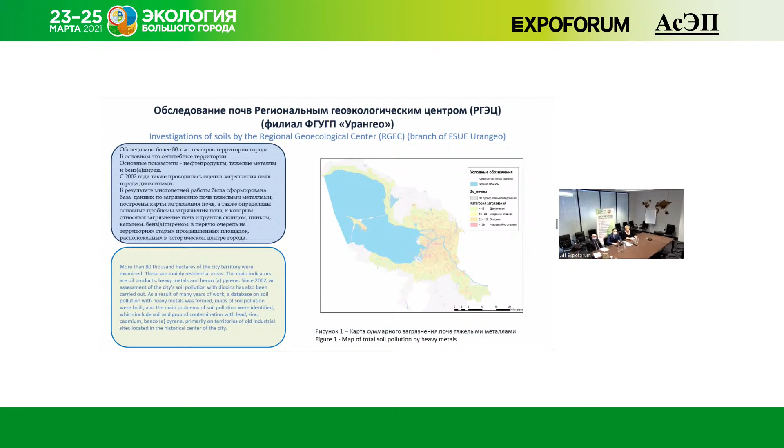Here, in the picture, you see the results of the investigation of the territory of our city from 1990 to 2020. About 80 thousand hectares were investigated. Petrochemicals, heavy metals, and benzopyrene were the main parameters to be assessed. Also, dioxin content was assessed. As a result, we produced such an integrated map. You see total concentration of contaminants in the territory of our city, and currently it is the only complex map telling us about soil contamination in our city.

The work carried out in 2019-2020 showed a bit different results because the tasks were a bit different. Our goal was to find proper places for monitoring posts. So we also carried out some work for petrochemicals identification, benzopyrene identification, dioxins. You can see the results on the slide. So what are our outcomes?

In St. Petersburg, the majority of soils in residential areas is dangerously contaminated, which is quite obvious. Historically, in industrial sites, contaminants were accumulated. For example, in the central area of St. Petersburg, in historical parts, we found mercury in the soil in the area of former gold plants, where structural parts were gilded in the past.

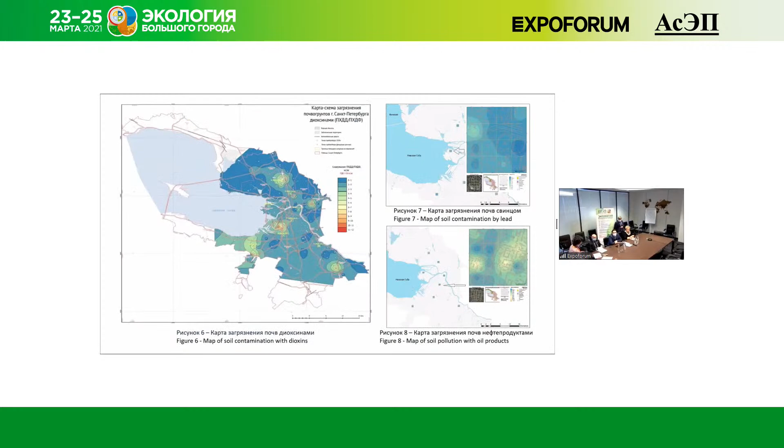Also, we studied the dynamics of soil contamination monitoring. We realized that within time, the concentration of contaminants is changing. As a result, we analyzed the situation with soil contamination in all the regions, and the results you see on this slide.

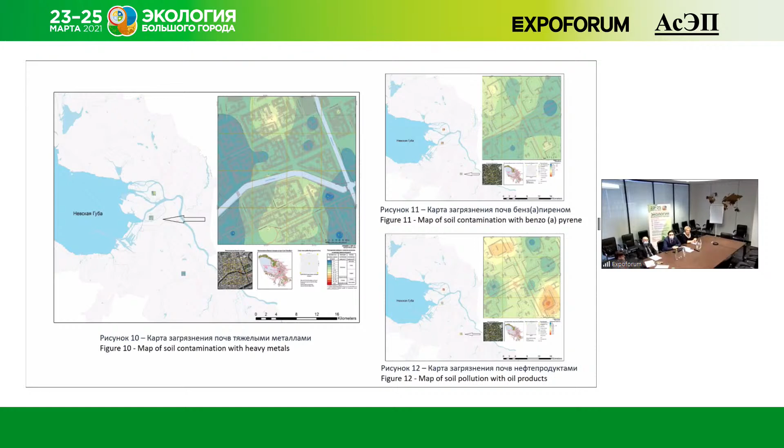We continued this work in 2020. However, the task was different this time. We needed to develop methods of monitoring, and we studied some additional territories in our city. The results you can see on this slide. Heavy metals, you can see 3 pilot areas studied in 2020, and the results of the study.

This work allowed us to assess the dynamics of content changing in the soil of St. Petersburg. As for heavy metals, their concentration is decreasing within the period of 30 years. As for benzopyrene, the concentration is increasing, which is in line with the Rospotrebnadzor statistics. We see it from the point of human health, not from the environmental point of view. As for petroleum products, it's the same. As for dioxins, it's increasing, but it is within the allowable range.

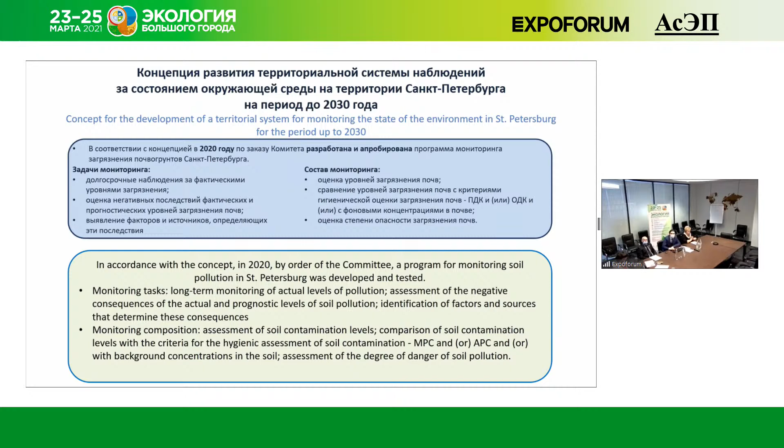Last year, the Committee for Nature Use developed a concept of the monitoring system development for the period up to 2030. And soil contamination in St. Petersburg is one of the aspects of this monitoring. So several tasks were set: long-term observation and assessment of negative consequences, as well as the reasons of soil contamination. So different soil contamination levels were assessed and compared with allowable maximum and tentative levels.

This work allowed us to identify 120 areas in all the regions of St. Petersburg to be studied. Also, key indicators in accordance with the monitoring program, including oil products, heavy metals, benzopyrene. So we plan to carry out survey in all these areas. So we are waiting for the results to compare.

This is the exhaustive list of all the indicators to be monitored. You see that for different areas, the list of indicators is different, but the basic contaminants are to be monitored in all the areas.

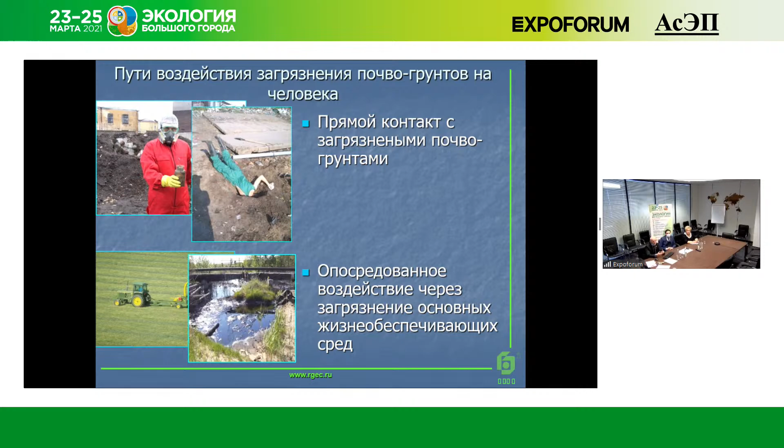So finally, the norms we use in the Russian Federation are not about direct contact with contaminated soil. These are heavy metals, for example. For 50% of cases, we have translocation criteria when we deal with contaminated soil via food products.

So when we say that in St. Petersburg contaminant concentration is 2 times higher, 5 times higher, it only means that we cannot grow food products there. It doesn't mean that the contamination directly negatively influences people's health.

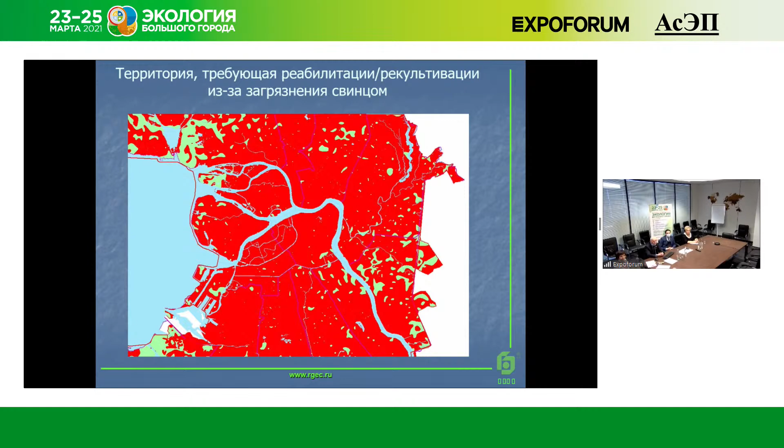In red, you see the territory in St. Petersburg which is not in line with the maximum allowable concentration norms for lead. You can be shocked, but if we look at the German norms for playgrounds, for example, the picture will be very much different. If you compare our Russian maximum allowable level with those of Finland or other European norms, you will see that our allowable levels are very much the same as those of European countries.

But the levels which urge us to immediately start cleaning are very much different. In Russia, it's several dozens of times higher. This is the difference of approach in Russia and in Europe.

Krasny Bor field is a good example. We have a lot of discussions about its contamination, but if we compare Russian norms with Finnish norms, we will see that we will not have any excessive contamination.

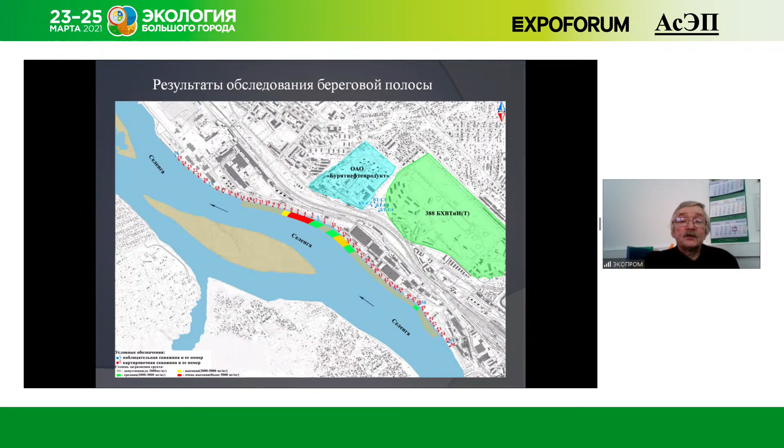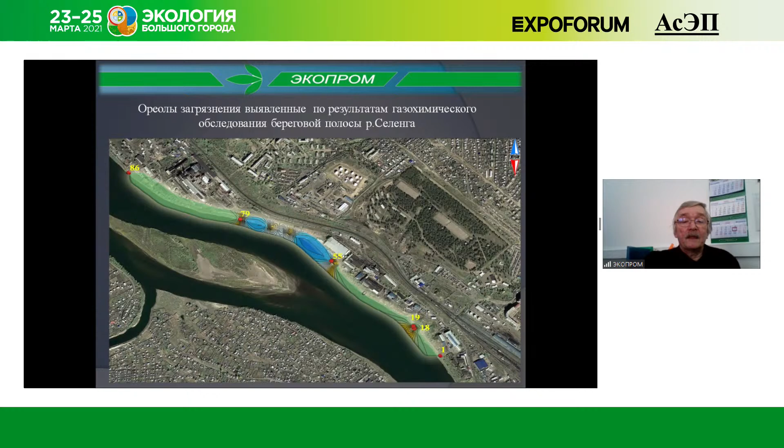We investigated the territory - 2.5 kilometers of the coastline. Chemical survey and drilling technologies were used. As a result, we identified a spot about 300 meters which was the most contaminated one. The soil was in very bad condition.

Except for the coastline, we also investigated the territory from the source to the Selenga River. Gas and chemical survey showed an approximate direction of petrochemicals from the source of contamination to the Selenga River.

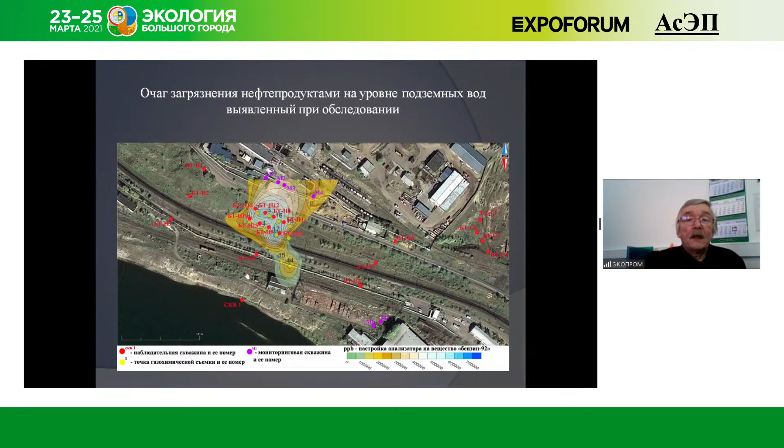To liquidate the process, we designed a project which allowed, at 2 levels, to protect the Selenga River, which flows into the Baikal Lake, actually.

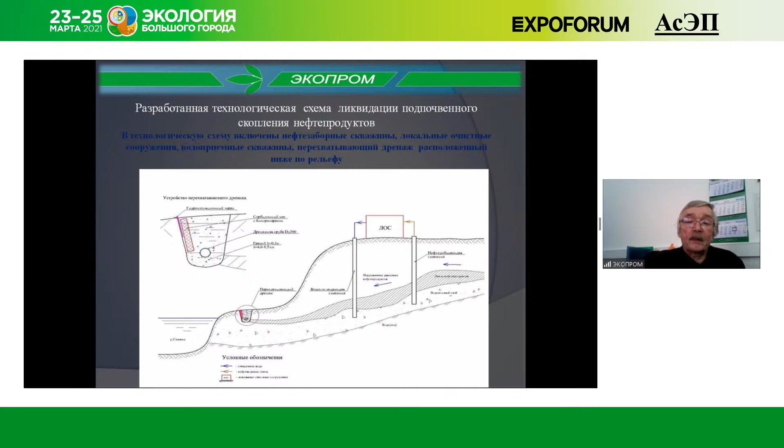First of all, in the project we designed a network of water wells to conduct the water and intake water in order to extract water from the contaminated area. At the coastline, we planned to construct a intercepting drainage system, which is a trench 1 meter in depth and width, filled with gravel, and there is a drainage trench there, the upper part of which is filled with cane bones.

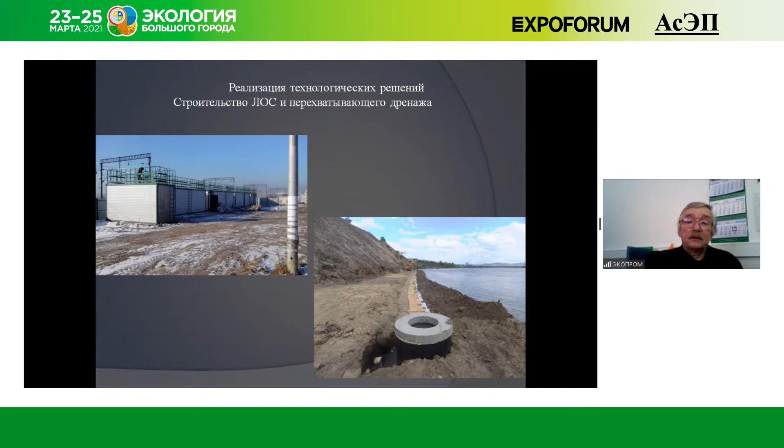So the project has been fulfilled. Here you see the local sewage plant - there are 5 modules there of continuous water decontamination. And you can see in the right picture a drainage trench organized along the coast of the Selenga River, which is filled with cane bones.

As a result of this work, we achieved the following: when we made the drainage trench, we extracted a lot of contaminated soil. Every year, cane bones impregnated with petrochemicals were extracted from the trench and replaced with new ones. 22 tons of cane bones impregnated with petrochemicals were utilized.

Except for that, 79 tons of water and petroleum mixture was extracted from the underground. As a result of the environmental monitoring, we realized that during the period of work from 2015 to 2018, the average capacity of the petroleum-bearing layer dropped 3 times.

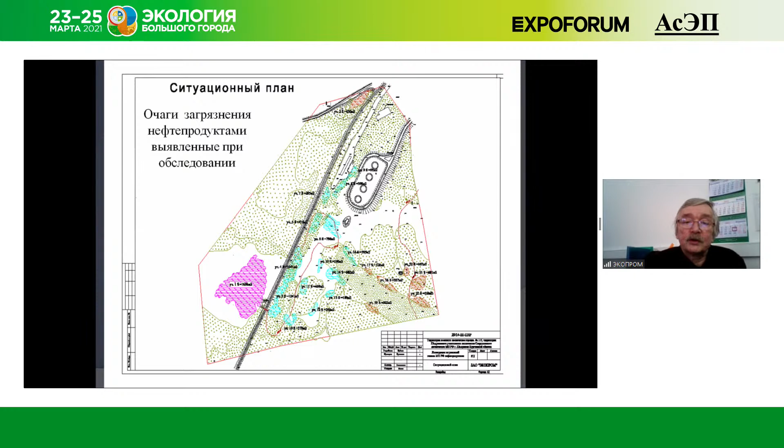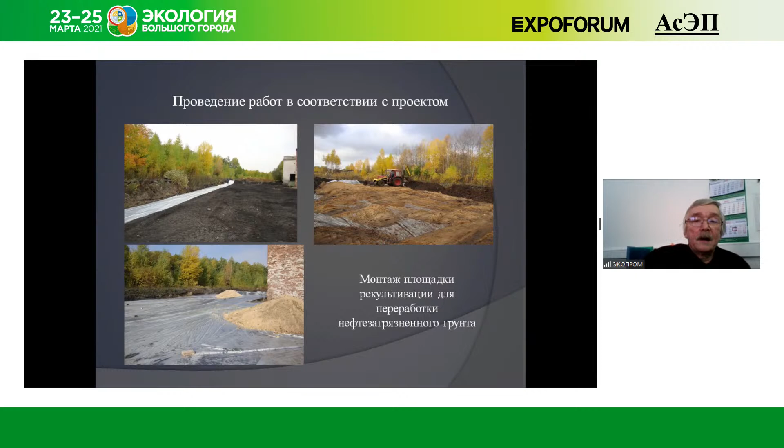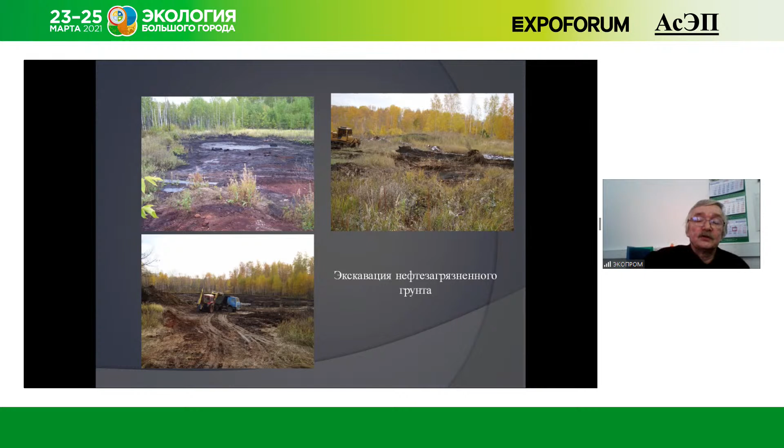In the picture, you see focal points of contamination. They're scattered around the site, and you see what we have done according to the project. We installed the recultivation field, the recultivation site. Here is the state of the soil contaminated with petrochemicals and excavation of the soil.

After 1 year of work, we extracted contaminated soil and performed a complex of biotechnological works. As a result, the initial concentration of the contaminant in the soil dropped 2 times.

Another site is located in Sverdlovsky region in the forest area. As a result of leakage, there were local spots contaminated with petrochemicals formed. According to the working project, we plan to decontaminate the soil by two methods: in situ without extraction of the soil, and with extraction of the soil with further cultivation in the field.

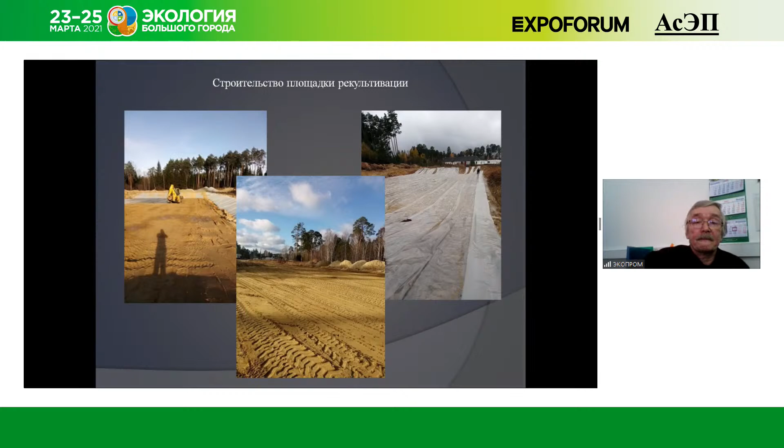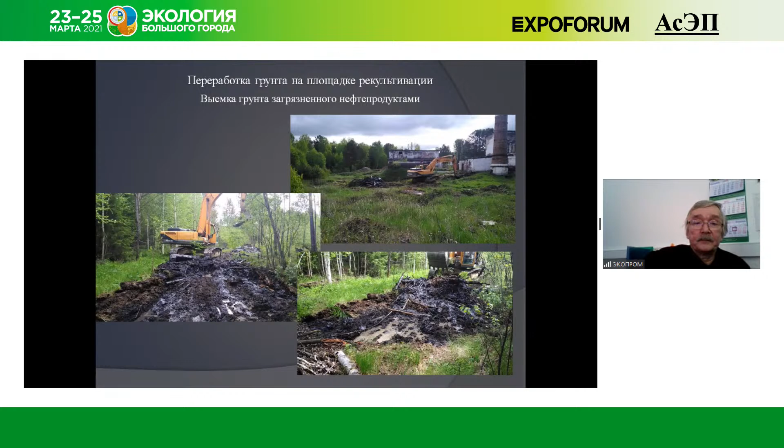Here you see the preparation of the cultivation fields. And this is extraction of the soil contaminated with petrochemicals. Placement of the soil at the cultivation field. Condition...

...of the soil after the first year of work, after we introduced structurators, mineral fertilizers, and bioagents. Here you see contaminated areas where we performed the cultivation without soil extraction.

We plowed the ground. We introduced peat. And then we treated the soil biologically. As a result, at the recultivation field, we decreased petrochemical concentration 2 times, and at the biological treatment site, without soil extraction, contamination concentration reduced 3 times. The work is not finished yet, it will be continued.

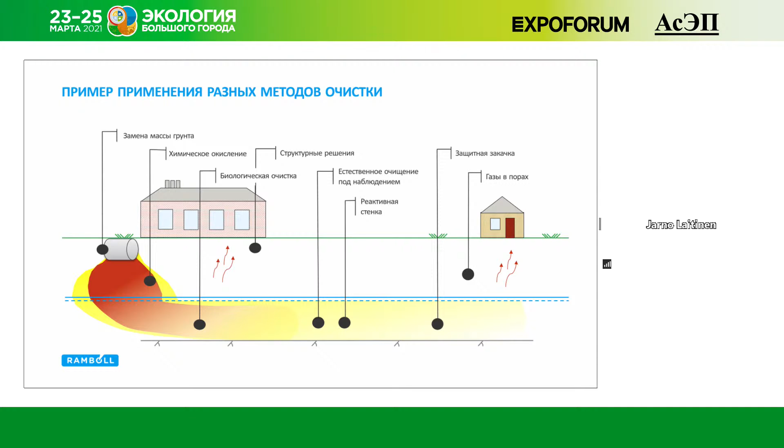So how do we move forward on selecting a method for remediation? Step number one is to identify the methods which would be suitable - meaning identifying what kind of remediation methods could potentially work for the contaminants in question.

Step number two is to assess their appropriateness, to see whether this method could be applied on this site - if the economics are good, if the soil is the right type, if there is no other infrastructure that would hinder the remediation. Now that we know the methods and the limits, we make different options out of this - for example, meaning I will excavate this part of the property and then use in situ remediation at this part of the property.

And then usually still at this stage you have a few options, so then you have to choose which one is most suitable for the project.

If we think about how to identify what kind of methods are best suited, it's best to start from the contaminant. Look into the contaminant - is this a contaminant that can be remediated with this method? Not all contaminants can be treated with all methods.

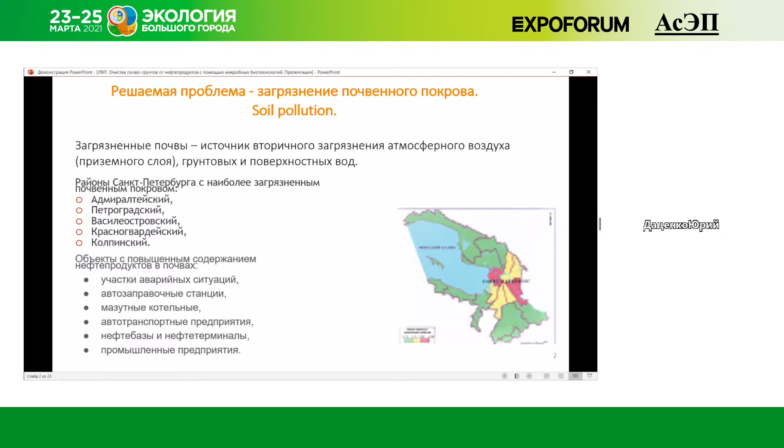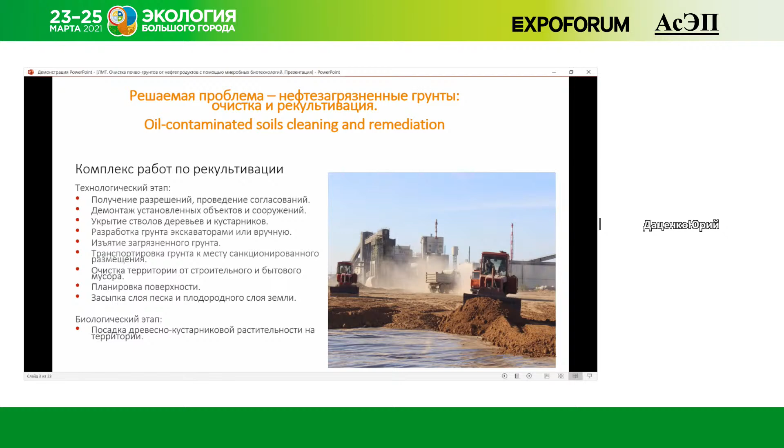This is the percentage of soil recultivated by excavation. So recultivation is quite a costly type of work, highly dependent on the weather. Of course, a lot of waste is involved with that, if we work within the city area. So all these are the limitations for using the method of excavation.

However, 90% of the soil is decontaminated using excavation method. So what do we offer? We offer a biological method - in situ rehabilitation based on the use of microorganisms, without excavation, without replacement of the soil.

Preparation of the project is 1 month. Installation of equipment is 1 week. The decontamination system requires a relatively small space. Our technologies allow us to get the level of petrochemicals in the soil from 0 to 15%. So within a couple of months, we can decrease the level of petrochemicals down to the optimal, allowable level.

In our company, we developed an underground biofilter system. It allows us to use microorganisms continuously throughout the year. The tank with the agent is above the ground, and we make injections - we introduce the agent into water-bearing layers. Underground waters distribute our bacteria, so it serves as a kind of transportation.

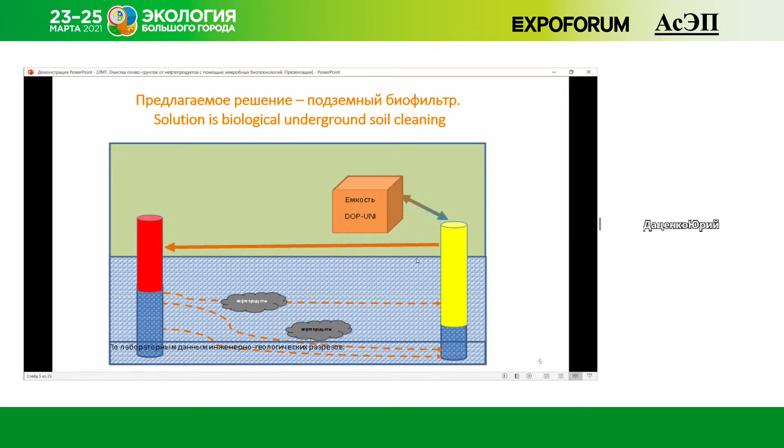So the technology itself is about the following. Microorganisms work to decontaminate soil. First of all, we have to identify the contents of the chemicals in the soil. Based on this information, we select the proper concentration of our bio agent, and we install the system, activate our bio agent, and then we monitor the situation. We see how petrochemicals are decreasing.

So we use water and non-pathogenic bacteria, which are not dangerous to people, neither for people nor for animals or plants. And no excavation is required. We do not touch the surface soil, which allows us to preserve all the plants and all the animals in the territory.

So the soil is transferred from a dangerous category to a low risk category, which is within the acceptable limits. This is experience of our technology's use in 2014.

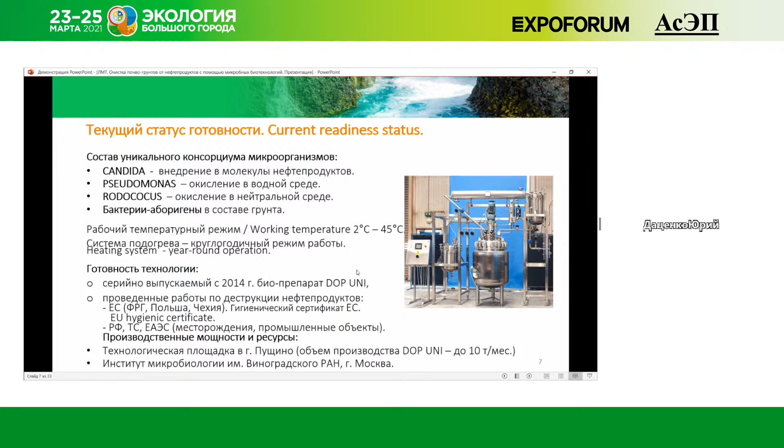Our institute is located in Moscow. We are working under the auspices of this institute and the Russian Academy of Sciences. The production platform itself is located in the Moscow region. This is a composition of our biological agent.

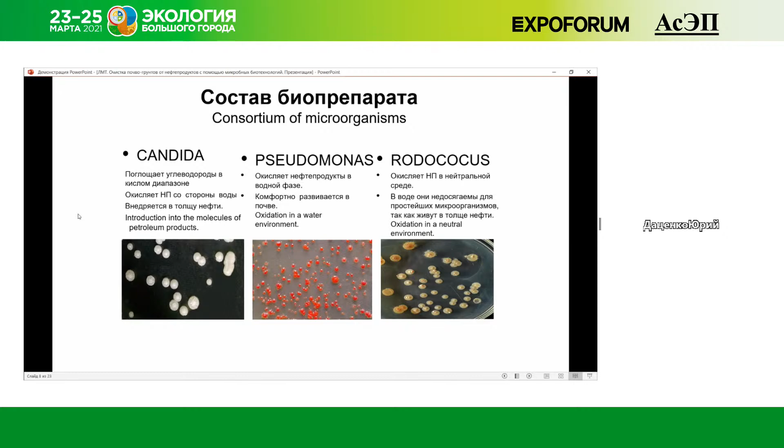Some bacteria penetrate the film on the petrochemical. They eat up the petrochemical - this is done by Candida and Pseudomonas, and Rhodococcus does the cleanup. As a result, we have active heat, water, and CO2. The speed of oxidation of hydrocarbons is 27% per month.

Can I remind you, the speed of work of our microorganisms is 27% per month. So depending on the concentration of contaminant, we can calculate in what time we can decontaminate this soil. These are the 3 parameters we use to report to our clients: results of analysis of petrochemicals in underground waters in soils themselves, and the results of microbiological survey.

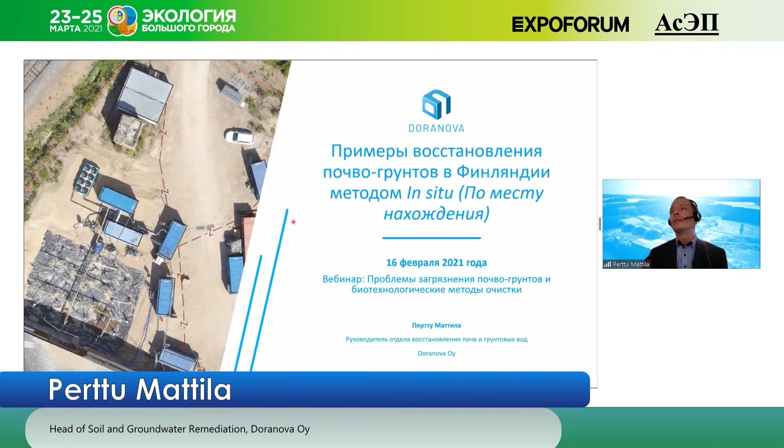Yes, hello all. Let's start the presentation. Hopefully you are able to see it now. First of all, thank you to the organizers for giving us the opportunity to give some insight from Finnish in situ remediation cases and views from a Finnish in situ contractor. So my topic is in situ remediation case examples from Finland, and here's the agenda for this rather brief presentation.

First a few words about the company that I'm presenting, and then altogether three case examples, all of these from biological in situ treatment of soil and groundwater. The first being one of our oldest cases, but in the context of the area and the size of the project, that has been one of the biggest ones.

So a site with chlorinated solvent contamination on a former factory area. And then the second case study is actually from the area of the city of Mikkeli. That's an old sawmill area, and there we had problems with chlorophenols in the groundwater, and that is also being treated with in situ methods.

And the third case example is also a rather big one. That's an old brownfield area, an old industrial area which is being converted into a residential area. So that's groundwater remediation in that case.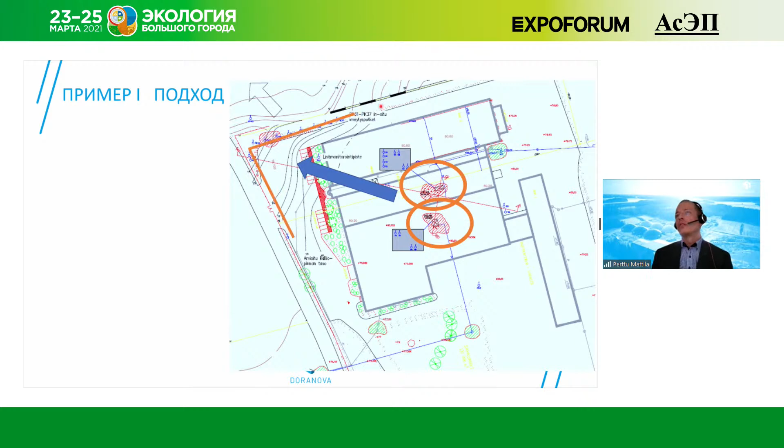Here we had some 30 injection wells which were used for the injection of the substrate into the subsoil.

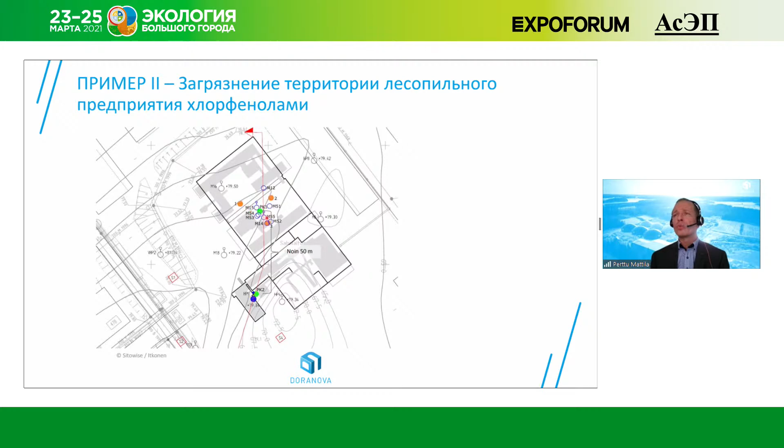Some background information about the contaminants: in this particular case, we had this anti-bluing agent used for treating timber, which has components, namely tetra, penta, and trichlorophenol, out of which tetrachlorophenol was the main contaminant in this case.

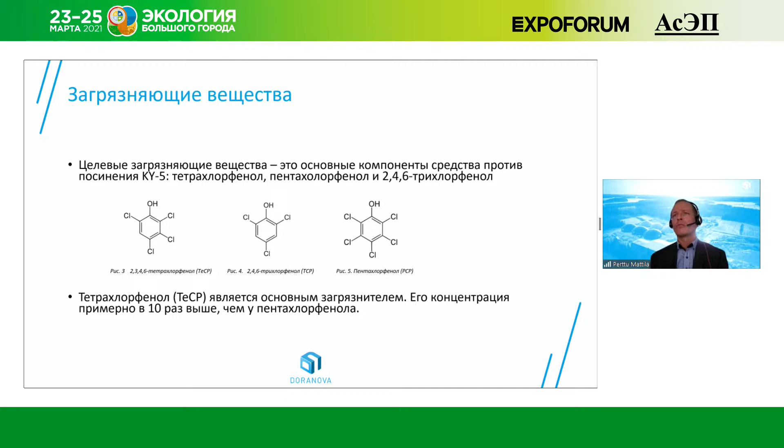We are pumping from one well outside the source area, then treating, basically aerating the water and taking out the contaminants. Once we increase the oxygen level of the injected water, it will eventually add oxygen to the source area, and oxygen in this case is the limiting factor.

There are university studies showing that if we increase the amount of oxygen in the soil and groundwater, the biodegradation will boost rather rapidly. So the idea is to change the conditions in this source area and get the microbes to break down the chlorophenols.

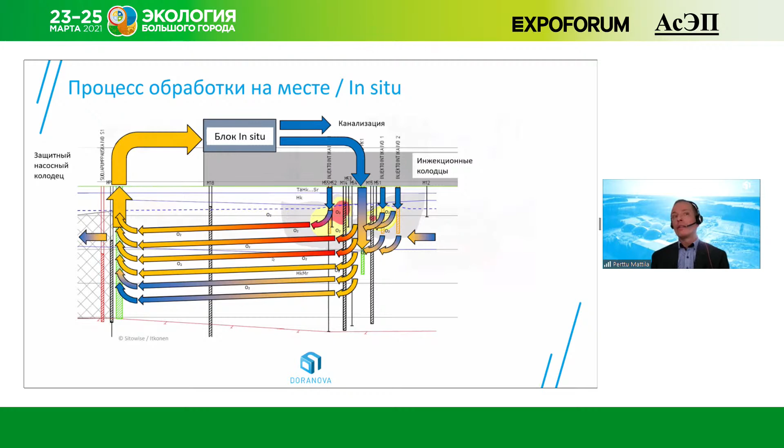In addition to this pure aeration of the recirculated water, we also injected chemicals which will add oxygen to the water.

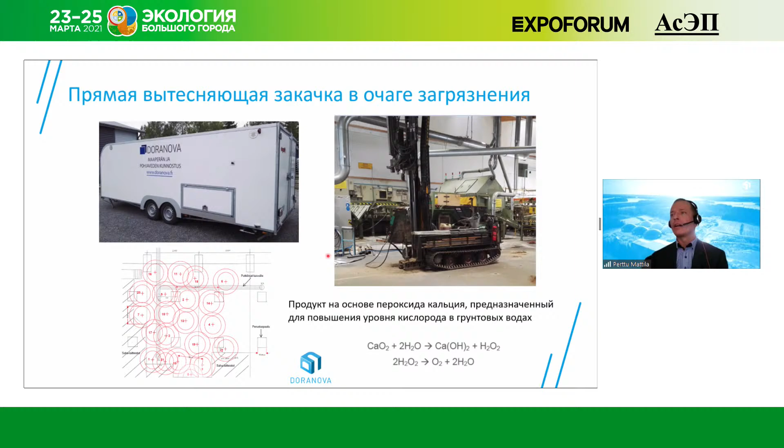This is also a project which is still ongoing, but here are some of the results or progress that we have obtained from this case.

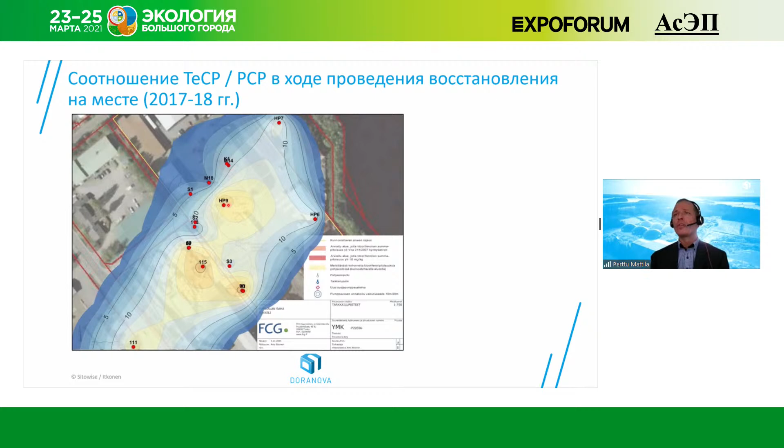So this is an aerobic process using fixed wells and also direct push injection of oxygen releasing chemicals to the source area—several different methods applied to one project.

Third example: this is a brownfield site where the groundwater is contaminated with chlorinated solvents.

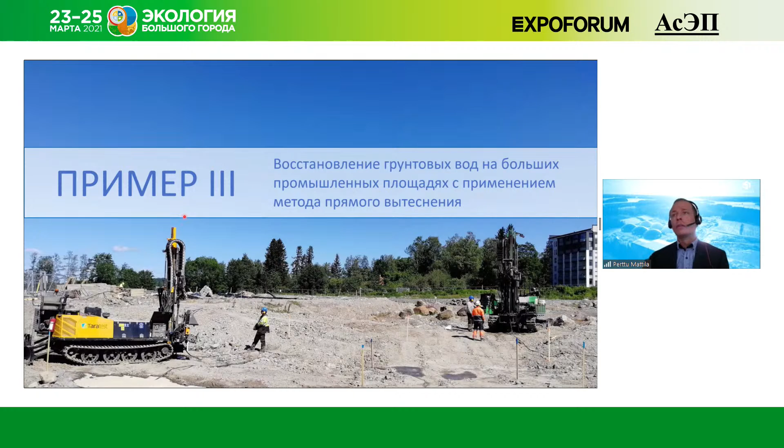In this case, it's an old brownfield, old industrial area with 100 years of operations. There has been a lot of excavation work done during the years, but the groundwater is still contaminated with chlorinated solvents, and the impacted area is over 9 hectares.

What we did in this case was inject and use this anaerobic biodegradation process once again, as in the first example. The difference from the first one is that we used direct push injection—basically, there are no fixed installed wells.

Instead, we used the injection rig and injected this kind of ERD substrate, so-called food for the microbes, in order to increase the microbial degradation. In 2019, on an area of over 1.4 hectares, we used over 400 injection points altogether.

These are photos from the site work. You can see the injection rig and the injection unit that we are using.

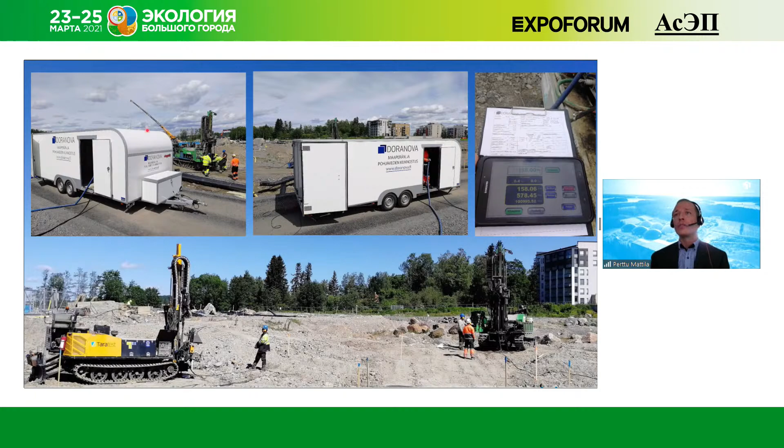Some results from this case: we are still taking monthly samples from several groundwater wells, but what we can see at every sampling point is that the amount of contaminants is decreasing relatively well across all the sampling points.

We can see that the PCE is breaking down to TCE, to DCE, and all the way to vinyl chloride, and then to ethene, and the total concentrations will go down. But this is also in a phase where we are still monitoring the results, although the field works have been accomplished.

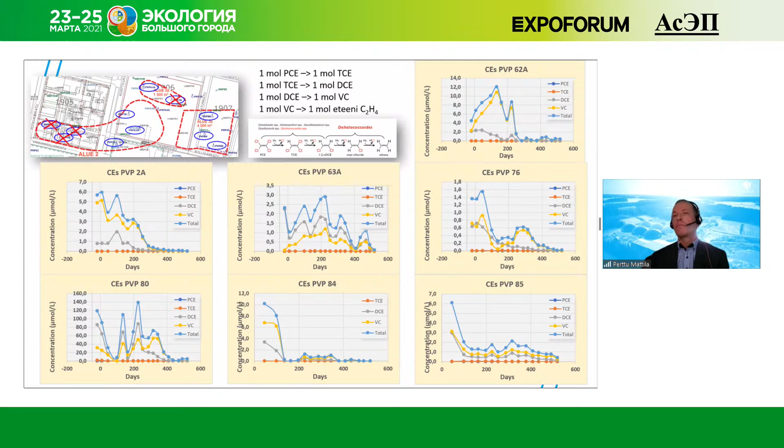Another thing is that we are using risk evaluation or risk assessment based models, so that we are not always bound to threshold or guideline values given in the legislation, but do site-specific risk evaluation.

Another thing is that since these are rather complex processes and projects, we tend to utilize the know-how of key experts from different companies. So in Finland we use a lot of cooperation with consultants like Ramboll, who have certain expertise, and then again we use some foreign companies who are expert in, for example, producing microbes for bioaugmentation. So it's a combination of different companies targeting one task to resolve the problem.

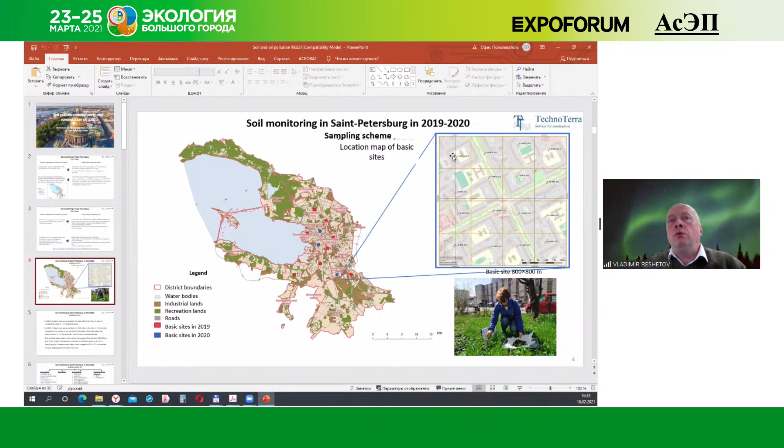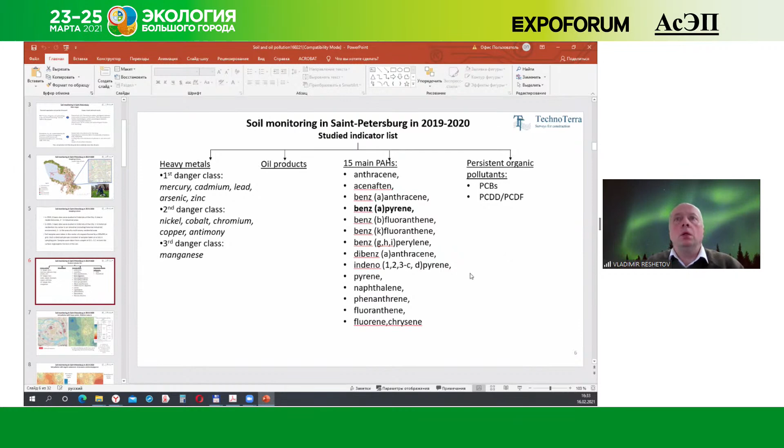In 2019 there were 8 areas, then 3 more areas were added. These are parameters we control: heavy metals, oil products, polyaromatic hydrocarbons, and PCBs and PCDDs, PCDFs. We selected areas in residential areas because our target was not to control acting industrial companies, but to control residential areas and the level of contamination there.

So our results are a bit different from those shown. And Andrei Vladimirovich told us about different approaches which can change our perception of the soil contamination results. So you see residential areas, people are in good health there, their life expectancy is quite high. However, we see that these areas are quite contaminated.

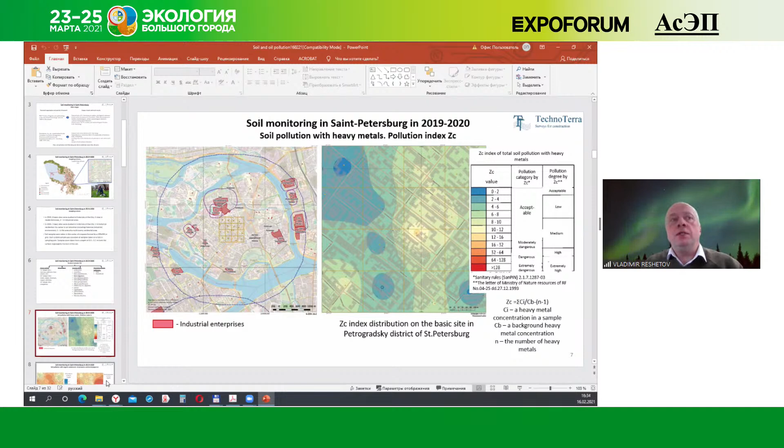We can continue monitoring. I hope that city administration will support us. If we speak about organic compounds, I can tell you that maximum allowable concentration is exceeded, which sounds quite bad, but...

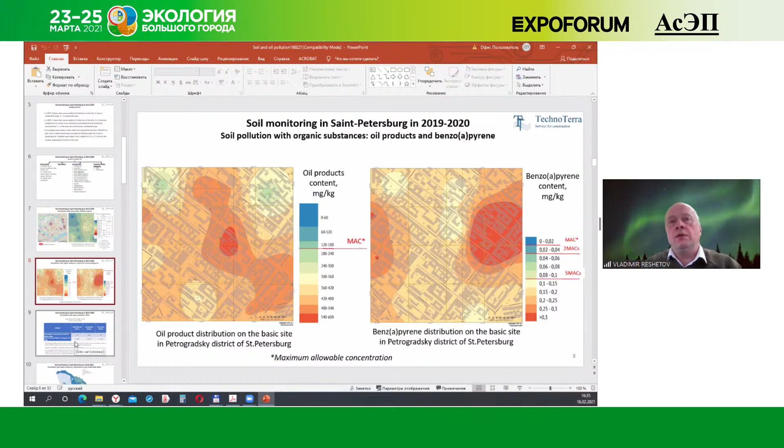You see, the situation is different regarding cancerogenesis. So in more contaminated areas, cancerogenesis is higher.

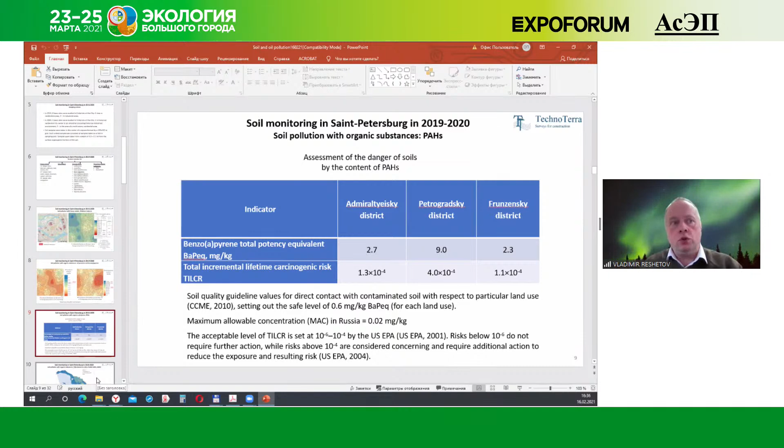Our work is not dedicated to liquidation of the catastrophic consequences like we saw after gilding of the dome of St. Isaac's Cathedral. Our task is to identify and manage the risks, and to help the city administration develop a proper policy to send money towards the most vulnerable areas, because you know it's quite impossible to decontaminate the entire city.

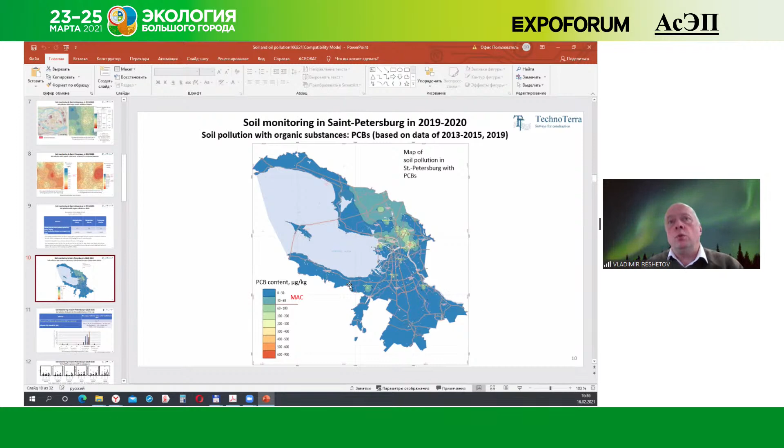Speaking about organic substances, the northern area is more contaminated. We identified 11 areas, and we see that the northern areas are contaminated more due to some historic factors. Heavy metals - if we compare concentrations with baseline ones, we will see a huge difference.

Polyaromatic organic compounds are seen here, benzopyrene in the first place. Oil products are here as well, but oil products are natural components, while benzopyrene is a product of technogenic processes. High contamination with oil products is seen in places where these oil products were used. As for benzopyrene, it contaminates the entire territory.

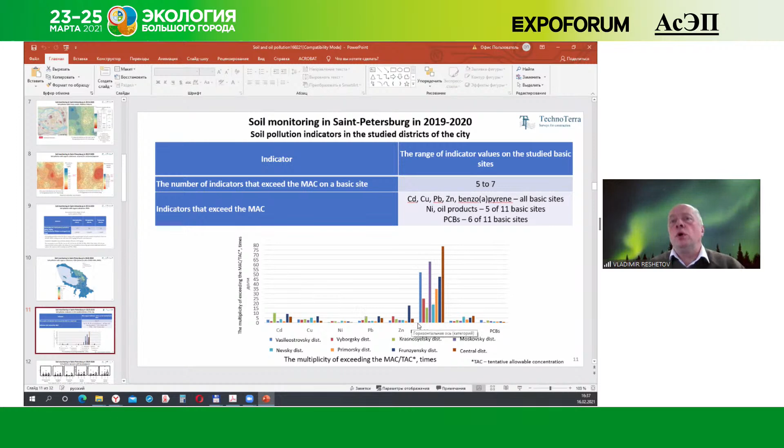I will show you why benzopyrene is more dangerous than heavy metals. We know that arsenic is dangerous, but not many people think of benzopyrene as a dangerous component. We try to take into account the regions and the possible error factors, so you see the central region, Primorsky region.

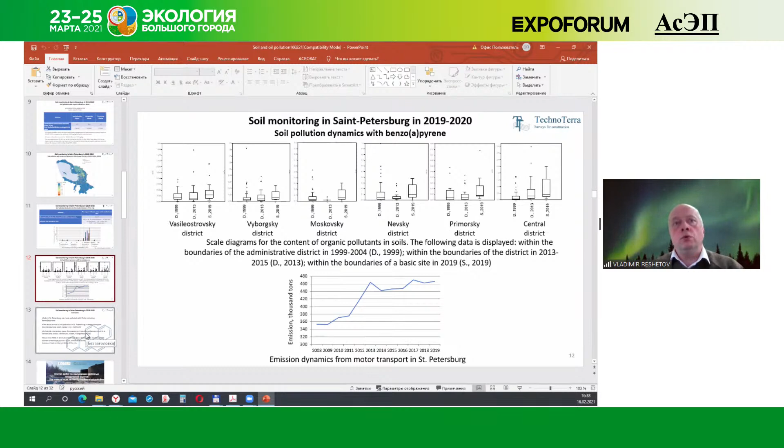This is dynamics over the years, and unfortunately the dynamics is continuous. Why so? Industry is going down, but we have more and more cars, and this enhances the situation with contamination. You see in the central district, the dynamics is the highest one.

Conclusions are the same as Mr. Serebritsky made. As of today, the priority should be given to organic substances and not to heavy metals. However, we still have to control the situation with heavy metals as well, because some contaminants accumulated in the soil long ago.

It's from the very beginning of St. Petersburg's history. Moreover, in the city, we have some sources from which these contaminants penetrate adjacent territories. We believe that underground water and atmospheric water distribute these dangerous substances. These sources may be old landfills or reconstructed industrial sites, which requires sanation.

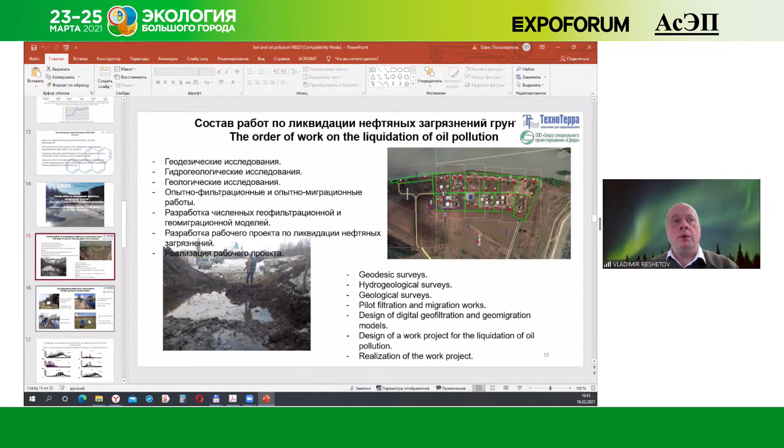In Finland, in Mikkeli, we saw how much money is spent. We actually calculated the price of contamination liquidation, and the price was about several million euro. So this is the level of harm. Before we start liquidating contamination, we have to identify the source - we have to decide where to go.

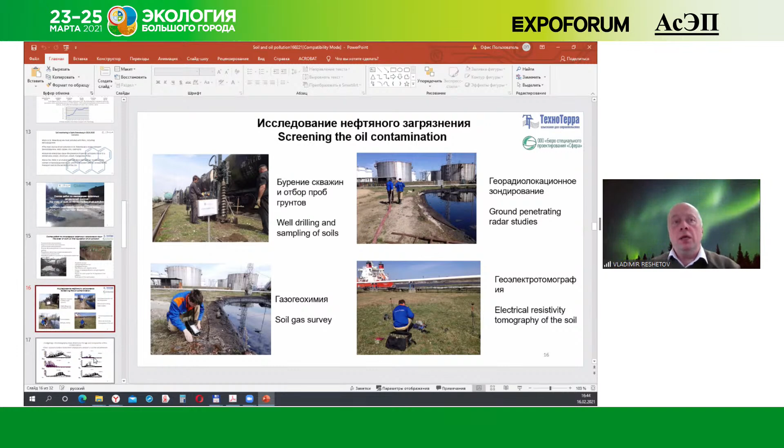So these are methods shown in this slide. It's pleasant to say that this is a joint work carried out with FCG company, and this work was done due to the order of the Helsinki Commission at the Leningrad fishing base. So we identified the sources of contamination, localized them using a gas chemical survey. Due to this, our liquidation work was quite successful.

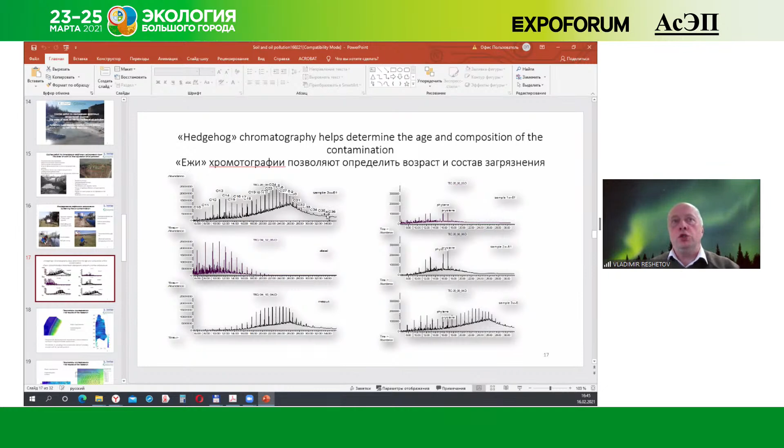So we also use chromatography. This technology allows us to say whether contamination is new or old, and what kind of contamination we have. Colleagues stated that every contaminating company claims that it's not them to be blamed, that this is an old contamination. So chromatography helps us identify when contamination was started.

After we localize the source, we have to understand the dynamics - we have to understand the direction the contamination is spread. This winter has brought more snow than the previous one, so we can say that the level of groundwater in St. Petersburg will change, and the dynamics of underground contamination distribution will also change. So this is a diagram we build to show how contamination will move.

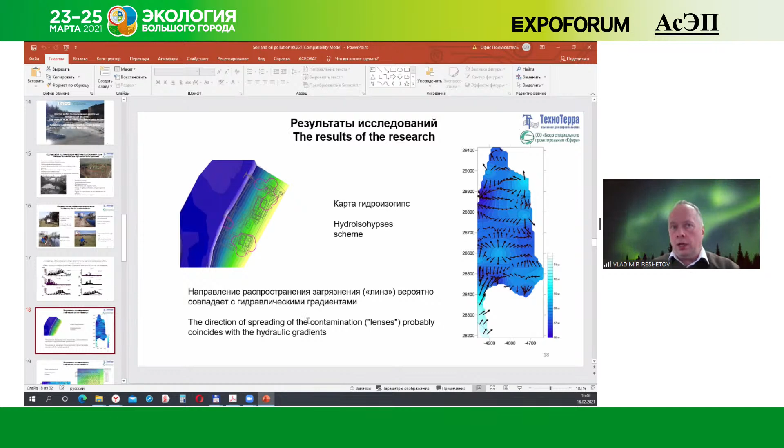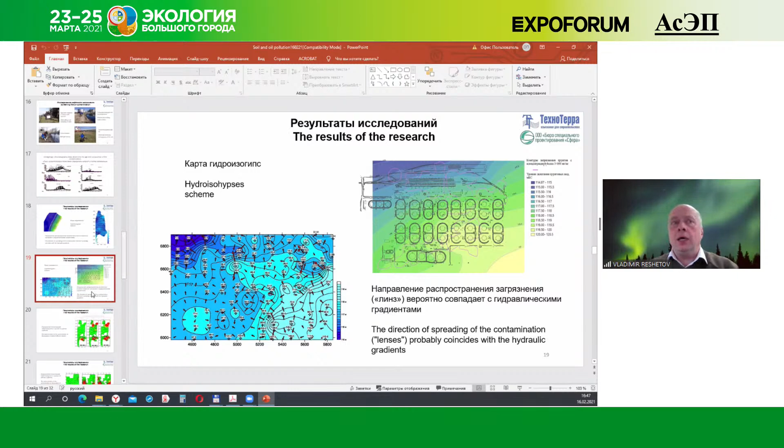So it's very flexible, it's changing all the time, but we can forecast how it will be moving and drill wells exactly when needed, where required. If we overlay the map of contamination direction and oil tanks, we will see which one is the source, and we can decide where to install the physical lateral drainage system.

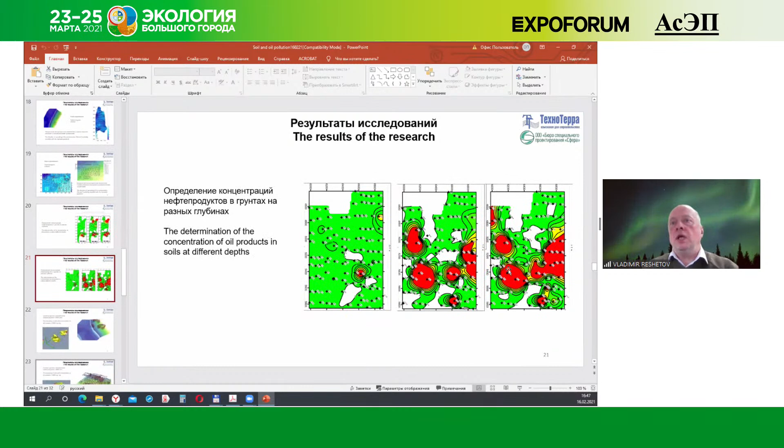In order to understand the scale of contamination, we take samples at different levels in order to understand how concentration is related to depth. Then we build 3D pictures, and based on the concentration coefficient, we can decide how to liquidate these leakages.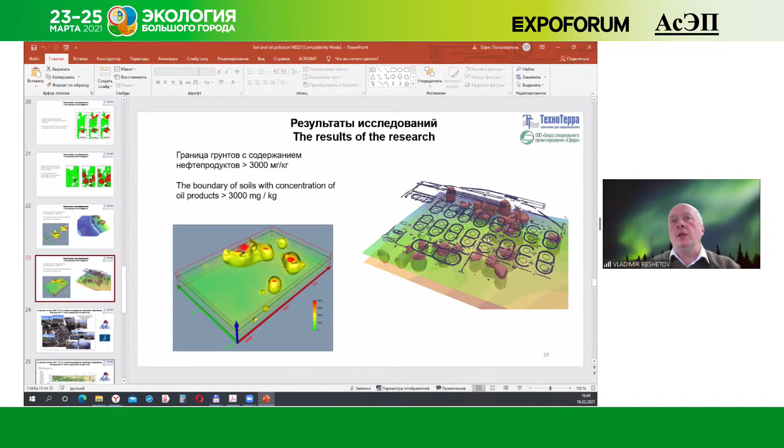Also, we can place 3D diagrams under the reservoir fleet in order to understand how underground water is contaminated and how it moves. Pay attention, there is a railroad here, there are some unload estacades, and this is always a high risk source.

So this is the project we performed by the order of HELCOM in 2013. This work allowed us to move up to a higher level. So I do hope that this seminar will also be useful for many people.

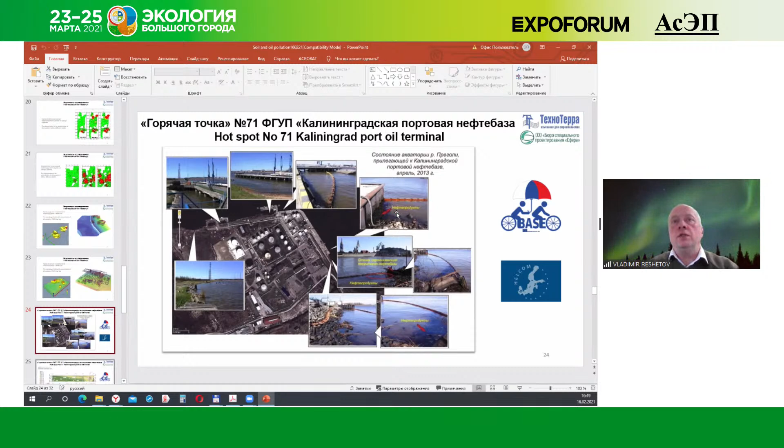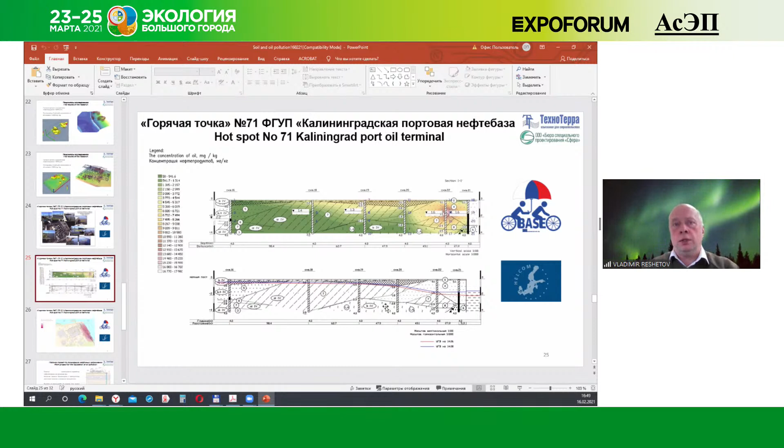These are oil-based, these are petrochemicals, and the combination of different technologies, geophysics, geochemistry, geology, helped us to identify the highest concentration of contamination and decide on the methods. And we understood the nature of this contamination.

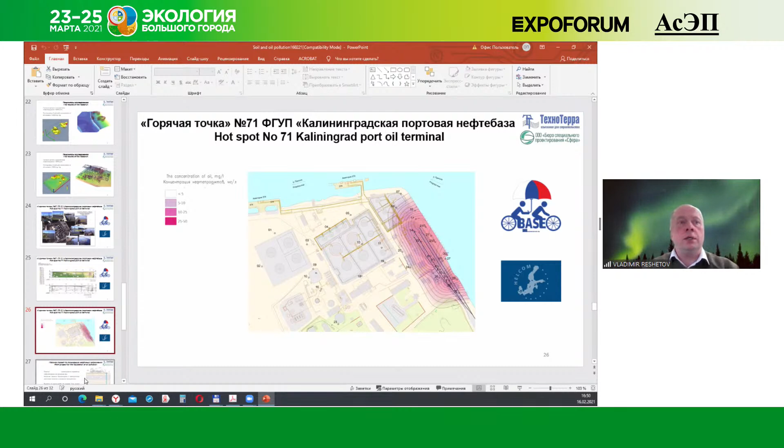This is a new territory, backfilled. Before, it was a coast. And petrochemicals are migrating towards the river, and we are able to understand the routes of migration.

So this technology is quite nature friendly. We are not using aggressive substances. We use bacteria which destroy molecules. Of course, there are different conditions to meet, the amount of oxygen, temperature, and so on.

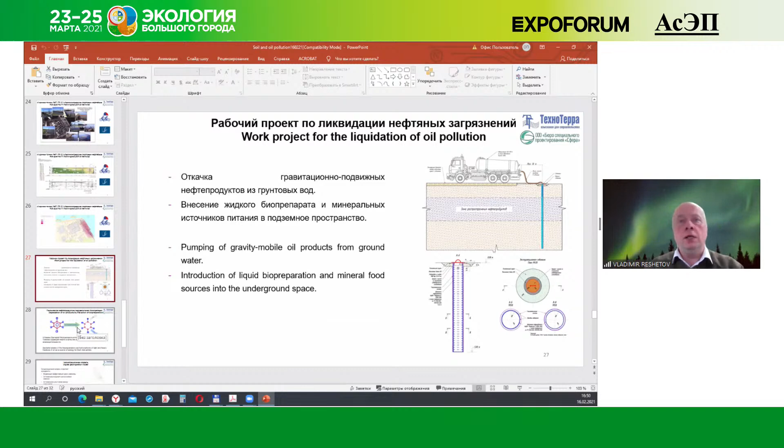The contaminated territories are quite large, so the volumes of introduction of chemicals are also much bigger than shown before. Decomposition of petrochemicals, it's quite obvious, so I will not dwell upon this.

Thorough preparation surveys allow us to make an optimal decision depending on the situation, how many wells to drill, where to drill them, and so on. So if contamination looks like this, unfortunately, we have to drill 4 wells. If we have only 1 spill, we can drill 1 well only.

So all this work allows us to effectively use decontamination technologies, which sooner or later, in a couple of years, will bring positive results.

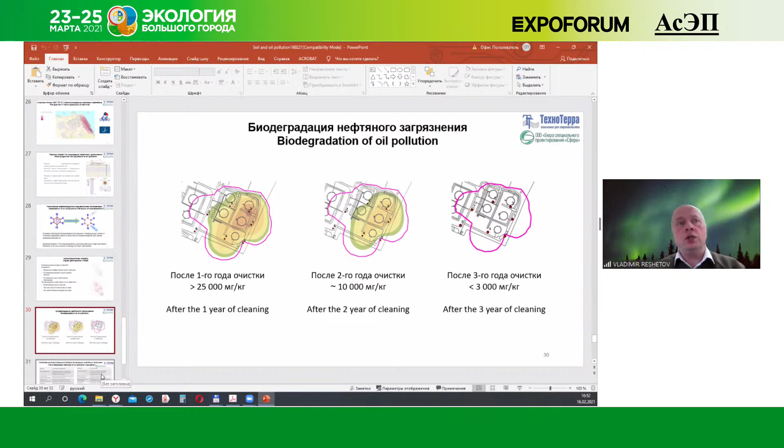Physical decontamination is also widely used, of course. I would like to sum up with the following. All these technologies are quite obvious. Identification of contamination, it's quite easy. No drilling, no construction is required. Then we have to identify the reason, the age of contamination, its scale, composition, and source.

If we don't understand the source, we will not be able to curb contamination. If petrochemicals are quite old, I think that it will be easy to solve this task. But if new, fresh petrochemicals are supplied every time, most probably we will not solve the problem within 5 or 10 years.

Then we have to understand the territory and the route, whether contamination is stable or migrating, what is the dynamics of the groundwater and so on. Then we have to select the method.